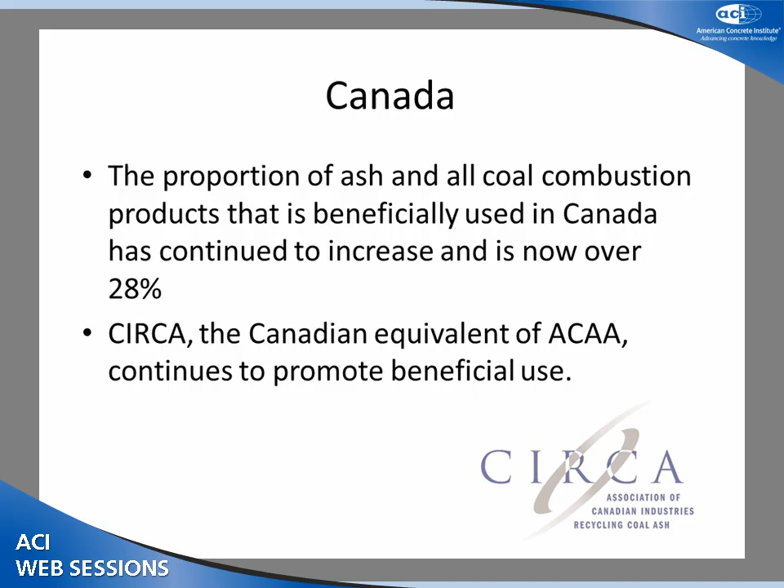We'll talk a bit about Canada, because being from Canada, I probably have more to say about Canadian ash use than other places. Tom, you indicated 43%, but Canada, at least with the latest data I have access to, is about 28% overall. In Canada, similar to the Ash Association, we have the Canadian Industries Recycling Coal Ash, CIRCA, and they are involved with promoting the beneficial use of ash as well. That's the latest government statistics in very fine print. That's what I can put together quickly.

And so on fly ash, it produced about 4.3 million tons, of which about 1.2 million tons has been utilized. This is from data averaged over 3 years, 2009 to 2011. So it's about 28% on the ash. The desulfurization gypsum, though, is 100% utilization. So that's one of the products that's been picked up quite readily by industry from the CCPs.

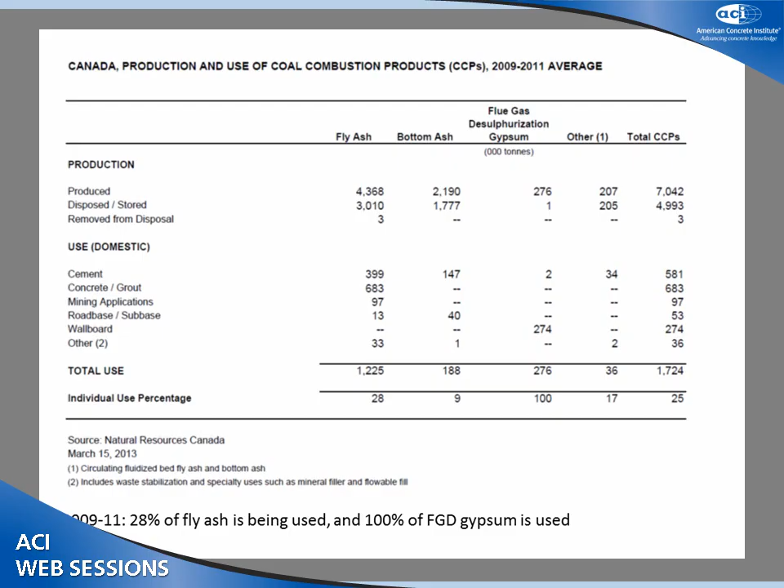And Environment Canada, which does the regulatory work similar to the EPA in the U.S., continues to maintain that coal-combustion products are non-hazardous. And we keep going back through CIRCA to ask them that question and they keep saying the same thing. There's no plans to move it. However, if EPA ever did declare it hazardous, you can see what's going to happen in a very short time.

We've already seen that on the east coast of Canada, where people in Newfoundland were getting fly ash from Nova Scotia from one of the power plants there to control alkali silica reaction, because Newfoundland is basically reactive aggregates, the whole province. They were using fly ash, and all of a sudden they couldn't get fly ash because the Nova Scotia Power Company said, we're worried about what the EPA is going to do, and that's going to open up our liability, even though it's in a different country. So they stopped supplying fly ash. So now the concrete company still makes concrete with reactive aggregate without fly ash, with slag.

And of course, there are challenges to these. Since 2012, they've required mercury reduction abatement. That's largely affected the big coal plants in Alberta and Saskatchewan. And they're using powder activated carbons to scrub the mercury. And this has impacted the ability to air-entrain concrete.

It's not so much, there is some LOI increase, but it's the activity of these carbons. They're very high activity carbons, so they adsorb some of these organic admixtures. I understand in Alberta they're experimenting with some new materials that will scrub the mercury with much less impact on that. But the initial materials had some impact on the ability to air-entrain concrete.

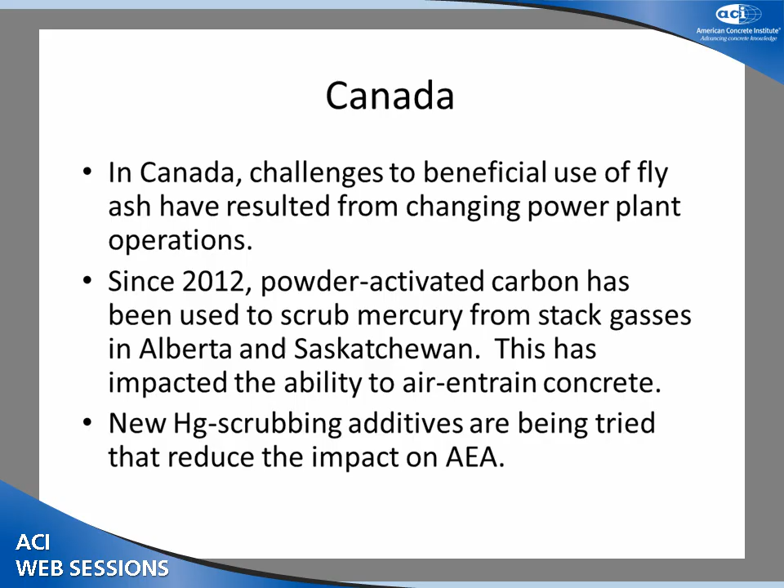I don't have any specifics on that because it's proprietary.

In terms of Canadian specifications for ash, they're different than the ASTM/AASHTO specs in that we classify the ashes based on the calcium content rather than the sum of the oxides, the sum of the silica, alumina, and iron approach. And I guess the sum of the oxides was meant to represent the glass phase of the fly ash.

Well, I'm not sure why iron was ever in that story, because most iron in fly ash is magnetite or ferrite individual particles, so it's not part of it. And even some of the silica and the alumina is there as mullite, inert ceramic material essentially. I've never quite understood why the sum of the oxides is a smart thing to do, except it was probably easier to measure the calcium at the time using chemical techniques.

And the other thing about the Canadian spec is that fly ash is part of the cementitious system. At ASTM, the fly ash spec C618 is in the C09 book, the concrete spec. It's not under the cementitious materials part. Ours used to be like that, but about 15 years ago we picked up all the materials, fly ash, slag, silica fume, natural pozzolans, and put them under one big standard for cementitious materials, because it's part of the cementitious matrix in concrete.

Then we actually fit everything into one standard. We have Portland cements, blended cements, and all the supplementary cementing materials in one standard, A3001. And it makes it a lot easier to deal with the cementitious system, having that sort of logic to it. And of course, the reason it's still in C09 at ASTM is history.

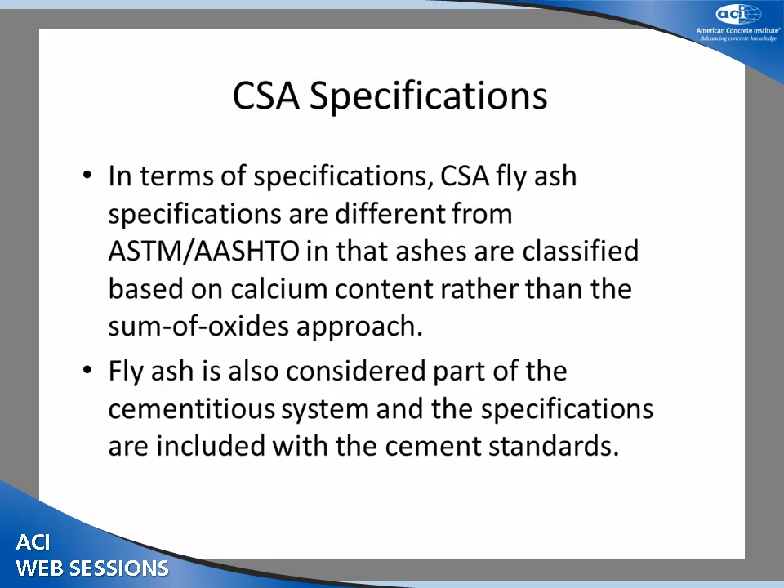When the fly ash people came to ASTM way back in the 50s, the cement people didn't want anything to do with them. So they went over to concrete because they gave them a home. And that history goes back a long way. And it was the same in Canada. We had to fight to move those things into the cement standard because of that history. People have long memories. But it makes a lot of sense that it was part of the cementitious matrix. So we have these classifications which we've shifted a bit.

The Class F ashes, instead of being 70% or more sum of the oxides, it's up to 15% calcium oxide. So it basically accommodates the Class F ashes that you would see here as well. And then we have two types of C ashes, 15 to 20% calcium and above 20%. The really high calcium ashes are ones that have some severe challenges in terms of durability concerns, like sulfate attack or alkali silica reaction mitigation.

And the ones in between, the CI ashes, can often perform very well. Not always, so they need to be tested. So we require testing of the CI ashes. Well, we require testing of all ashes, but the CIs can be either really good or sometimes they behave more like a CH. But once they get above 20% calcium, then we have concerns about the durability issues. They're often good technical ashes, good early setting times, good strength development, but they often are associated with some durability issues.

We also sort, in terms of ASR, on the equivalent alkali content. We consider anything up to 3% alkali as being low in terms of the ash. And then we have a second category, if you're up to 4.5%, you need more mitigation of the ASR potential. And if it's above 4.5, you have to use testing rather than an expert system to prove it.

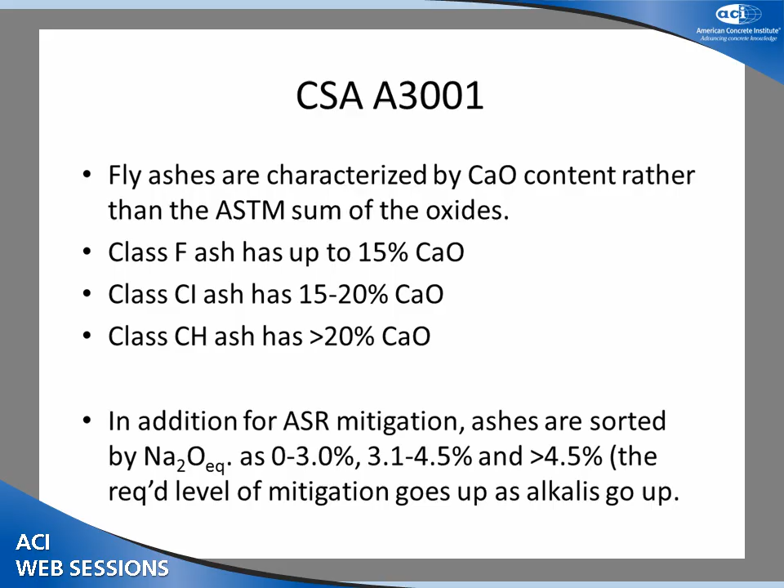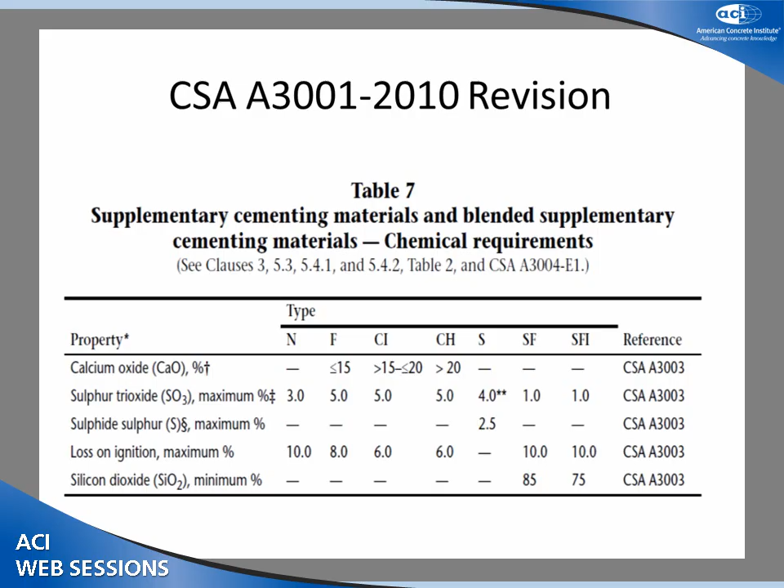Okay, so A3001, what was I going to show you here? Oh yeah, there's the calcium. The top line there, the F ash, CI, and CH, it's all regulated based on the calcium content of the ash. And then we combine some natural pozzolans, just like the US, F, CI, CH, and we've got slag, silica fume, and we've got a lower SiO2 silica fume as well. They're all in one table in the standard. And so the only thing that applies to ash, really, other than sulfur trioxide and loss on ignition, is calcium.

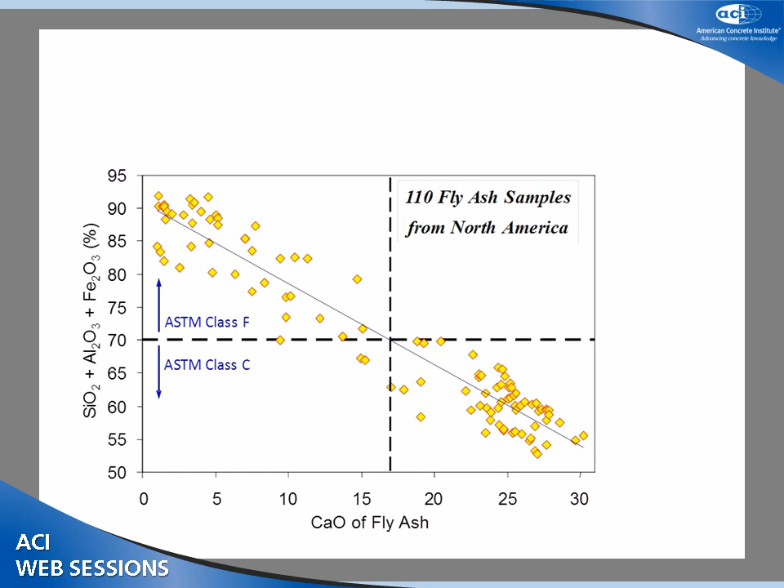Okay. So in terms of how that relates, as I said before, this is some of Mike Thomas's data that he's pulled together, comparing how you would classify things in ASTM on sum of the oxides versus calcium oxide. And the 70% sum of the oxides is around, if you draw through the median, the best fit line, 17%. But when you get down to the noise in the data, it's about 15%. So in terms of performance, I'm pretty comfortable with the 15% being similar. So an F ash on one side of the border is pretty much an F ash on the other side of the border.

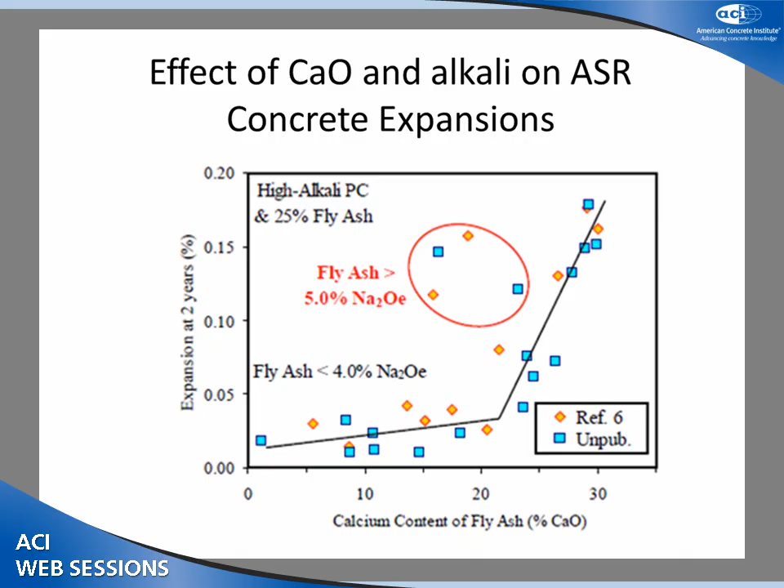To mitigate ASR, you've got to reduce the pore solution concentration of hydroxyl ions down to a level that they won't attack the siliceous aggregates. And so if you have high calcium fly ashes, you're adding phases into the system that can keep that hydroxyl ion concentration up, unless you put in a lot of fly ash. But at 25%, it's insufficient when you get to these high calcium ashes. So it's not that you can't use them, you'd have to use a lot more fly ash in that case to control it.

Okay, now for sulfate resistance there's a similar graph. This is with some ashes where we blended different F's and C's, or this is Mike Thomas's data again, because I was scrambling to get some data together here. Again, related to calcium content. Typically we want 0.1% expansion or less in C1012 at a year. And so when we get down below 20% calcium content in the fly ash at a 25% replacement level, we're below that expansion limit.

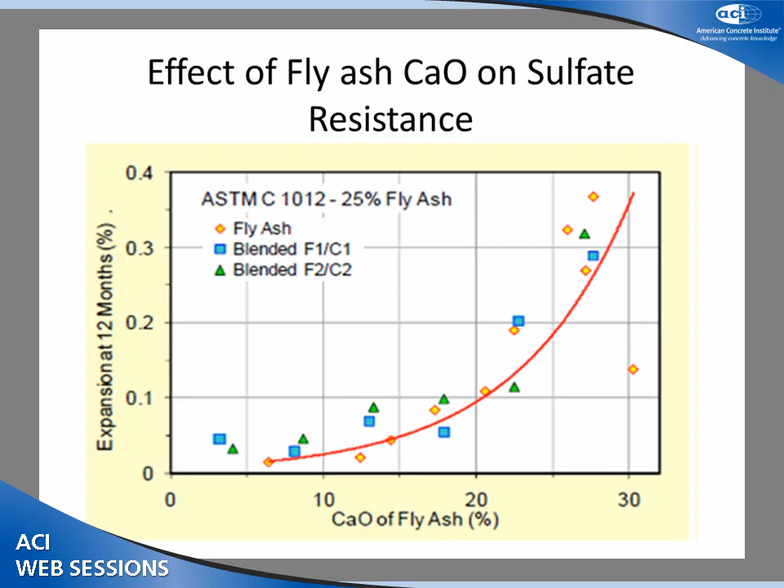And if you want to be sure, to get a little more safety factor, 15 is what we pick. So we're saying 15 to 20 may work, but you need to be more careful in the testing, and below 15, at a reasonable level, you get good sulfate resistance. But you start to see the sulfate resistance deteriorate at a given amount of ash, because you've got things like tricalcium aluminate in some of these high calcium ashes. You've got other phases in there that may contribute to the sulfate reaction. It may actually be detrimental at a given level of ash replacement. So the calcium content is where we are in the Canadian standard with respect to those two durability issues. And that's why we picked calcium as the indicator.

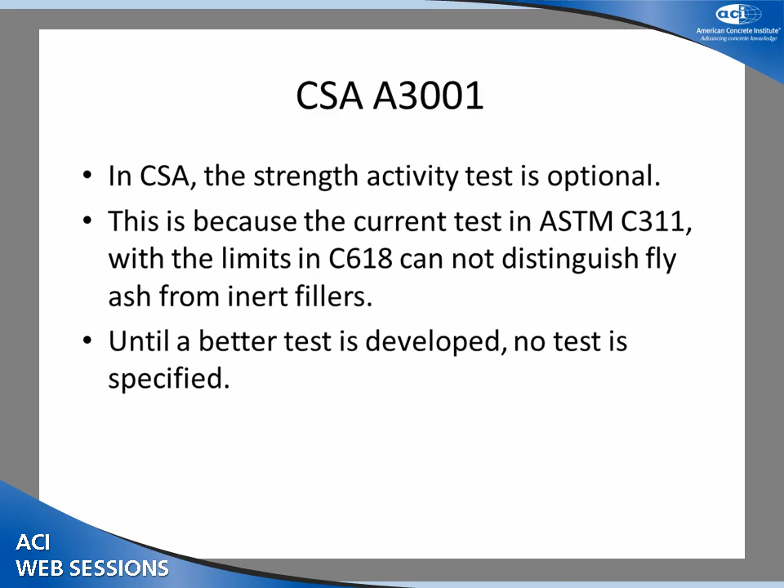The other thing, since I'm talking about random elements related to fly ash, we use the same strength activity test in the CSA as the ASTM C311 test, and we had the same test limits as in C618. But then we made them optional because the current test method in C311 and the current limit in C618 means you can take inert fillers and pass the test. So why bother doing the test? And so we just said, look, it's optional. We're not going to mandate anybody doing that test because it doesn't tell us anything, until somebody comes up with a better pozzolanic test or a better test limit to evaluate it in comparison to.

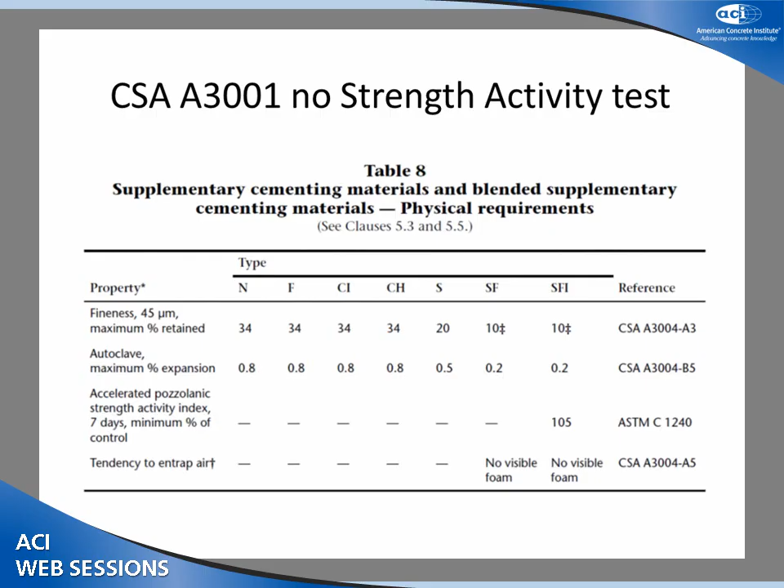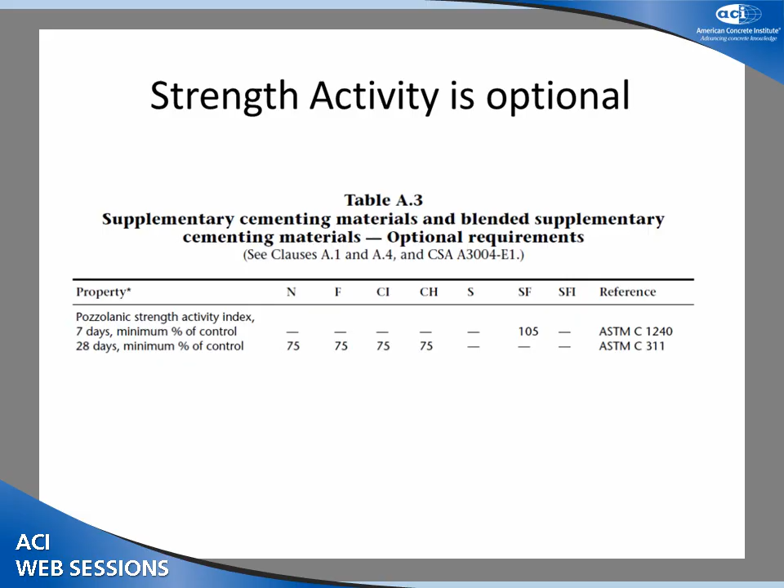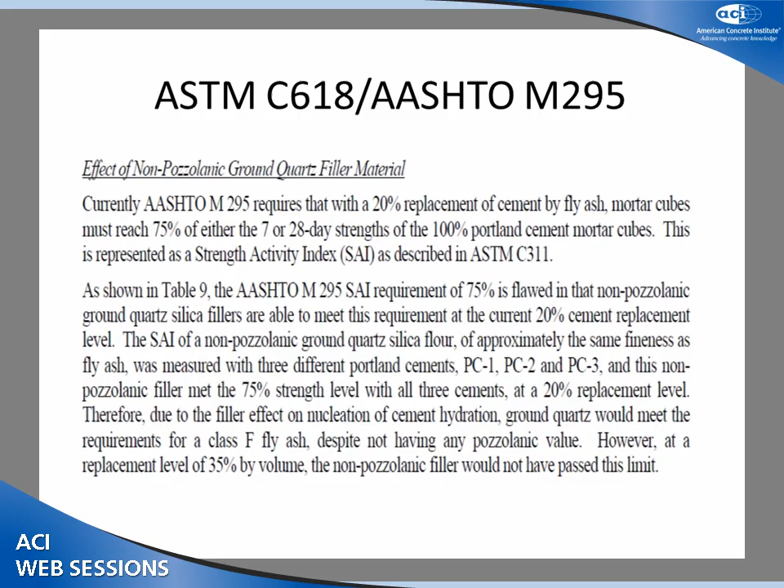And so when you look at the table for supplementary materials, the only test it requires is for silica fume; the rest of it's non-mandatory in any of the fly ash categories. And there's the optional test, and again, it's the same thing. It was the 28-day test, just like in C311, with the 75% requirement, when you take 20% of the cement out, and so essentially you get 75% of the strength after 28 days. That's great. So you can take a ground quartz filler and pass that test. The limits are in C618. You can take a ground limestone filler and pass that test. So to me, the standards committee at ASTM needs to think about that in terms of modifying the test.

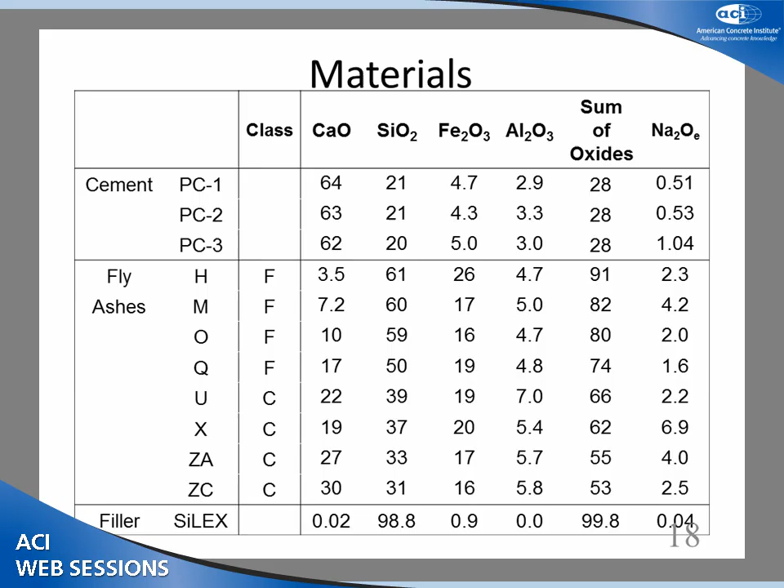We did some testing. I did some testing together with Larry Sutter a few years ago on a pooled fund study, and here we used a quartz filler in this case. We used it with 3 different Portland cements, and we tested it relative to 8 different fly ashes, C's and F's, and we looked at the strength activity index, and this is just with the quartz filler.

giving us anything. Now, if you went to 35% replacement, which is the old activity index test, then those fillers wouldn't pass, because 20% is about optimum for a lot of different fillers. But when you get up to higher replacement levels, when there's nothing going on there, then you start to distinguish the non-reactive materials from reactive materials. So one of the big problems was that switch from 35% to 20%, which was about 15 years ago or more. And so they wouldn't have passed the old strength activity index under the old system.

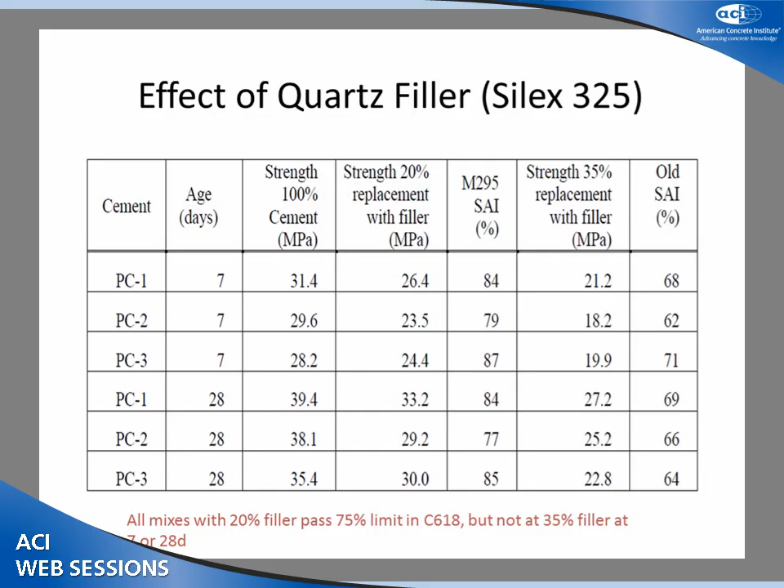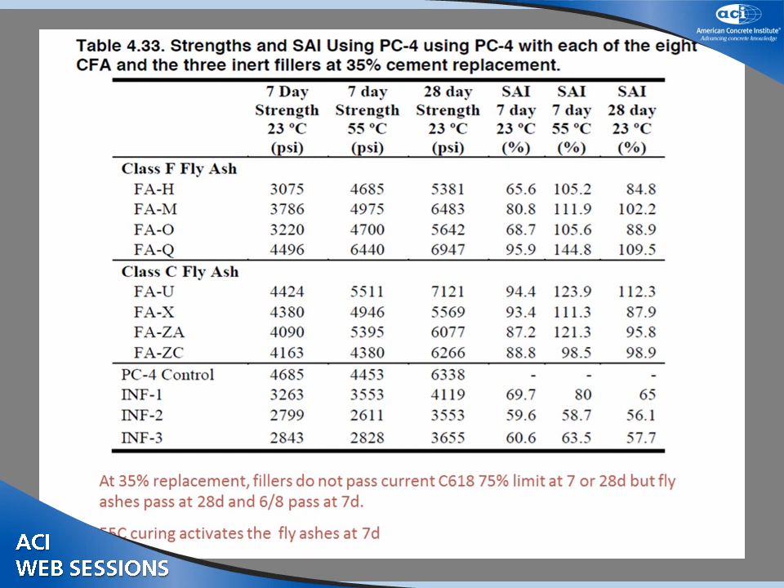Okay. We tried just for fun. We did it with three different fillers, and we got different results. Some fillers work better than others, but you couldn't distinguish the fillers from some of the fly ashes in that case, especially the 7-day test.

Okay. Now, closer to home in Ontario, and Tom mentioned that Ontario is getting out of the coal power production business. By 2014, all the coal plants would be closed in Ontario. They were shutting them down over the last 7 or 8 years, several units at a time. And it used to be that coal power was our largest generation in Ontario back when I was with the power company. But for the last 25 years, the ash that has been produced, because it was used for peak power production, tends to have variable and high loss on ignition values. We often see loss on ignition of 12, 15%.

So that didn't make it very useful for concrete, but it has been used very successfully, almost 100% of the Ontario ash, as cement kiln feed by the cement industry. If you take a material that's got 12, 15% fuel in it, they're getting free fuel with the raw material. They get their iron, their silica, and their alumina from that material, and the silica is already fused into a glass, which makes it easier to combine in a cement kiln.

They actually saved about 15% of their energy by using fly ash as a raw material in the cement kiln. So they've had unit trains running into Michigan. Alpena, Michigan has been using Ontario fly ash as part of their raw mix for the last 20 years or so, amongst other companies. And it's the cement companies that are largely using the FGD sludges as well as gypsum replacements.

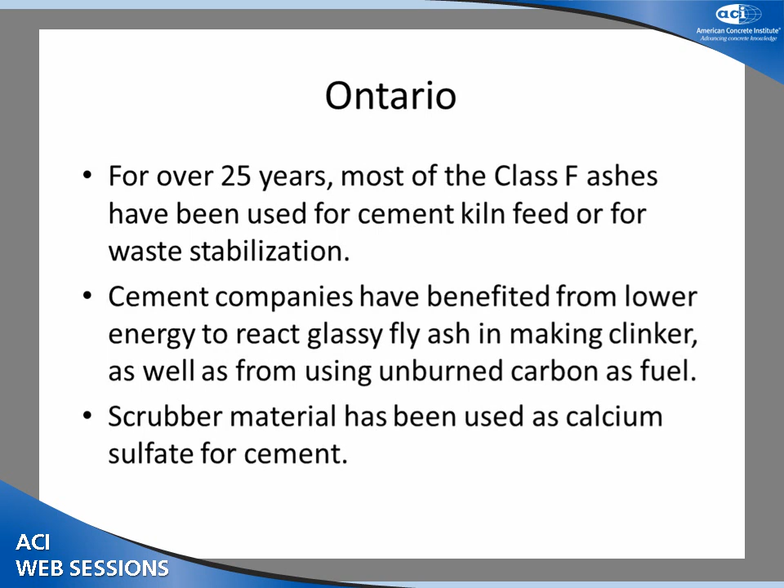Okay. So I mentioned this, they're shutting down, the last units will close down in 2014, except they're going to convert one or two up in northwestern Ontario to biofuels because of local employment issues. So there's politics involved with all this as well. Now the tobacco farmers in southwestern Ontario are wondering why they can't burn tobacco instead of coal in cement kilns.

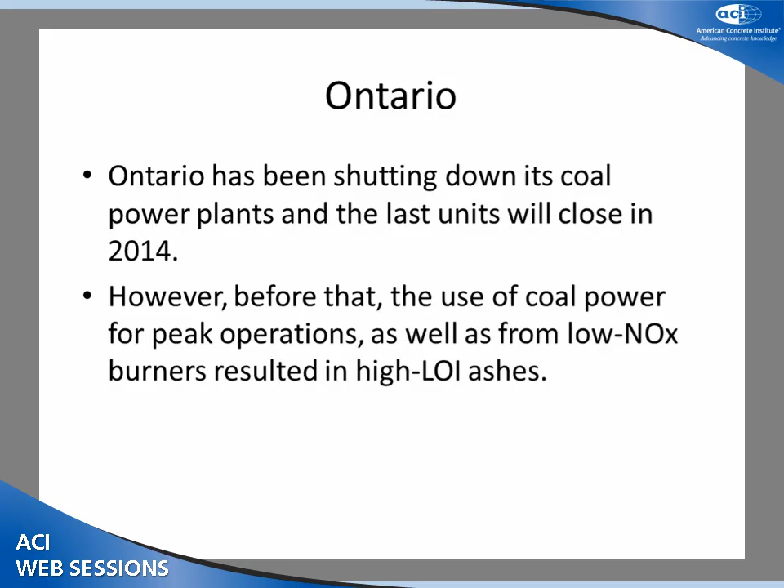Okay. So I thought I'd talk about a couple of examples. How am I on my time?

Yep. I'm good? Okay. On the beneficial side, I'll just talk about a couple of things, since I'm in Ontario, about where ash has been used positively. This is a dam that was built in 1970 up in northern Ontario. There's a spillway on the left and the penstocks coming down, and the main front of the dam is concrete, the rest is rock fill. But it was built with reactive aggregate.

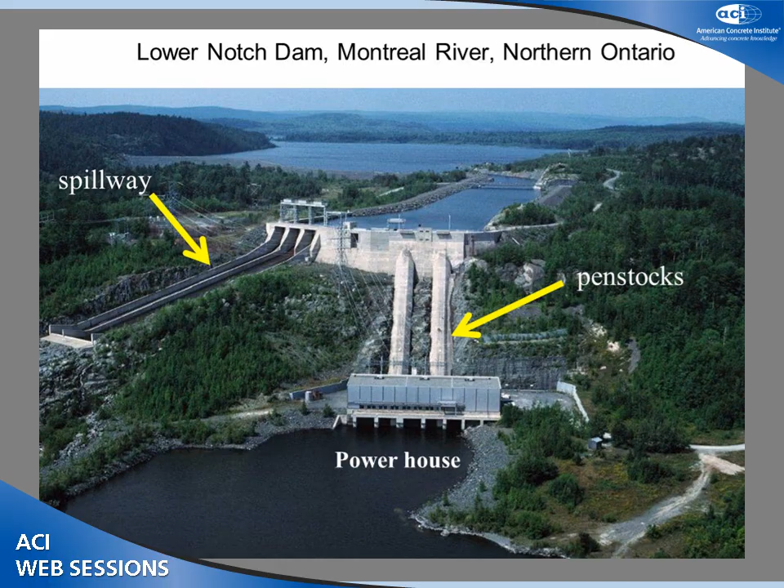Because the forebay above the dam had to be excavated, and it's all reactive rock. And of course, it's way out there, about 6 hours north of Toronto, and they had to use it. At the time, there weren't a lot of options. So it was built with this reactive greywacke argillite aggregate. They only had the C227 and prism test then, and they found with that C227 testing that you could control this with low alkali cement, or you could control it with 20 or 30% Class F ash.

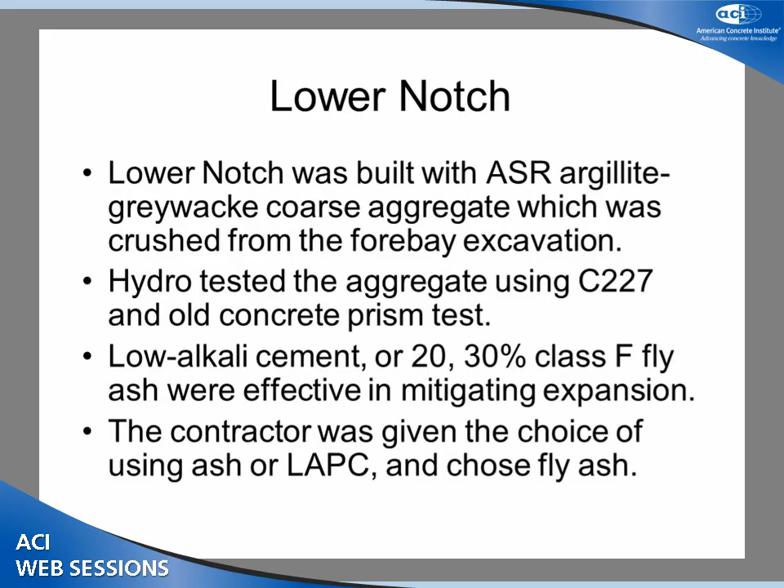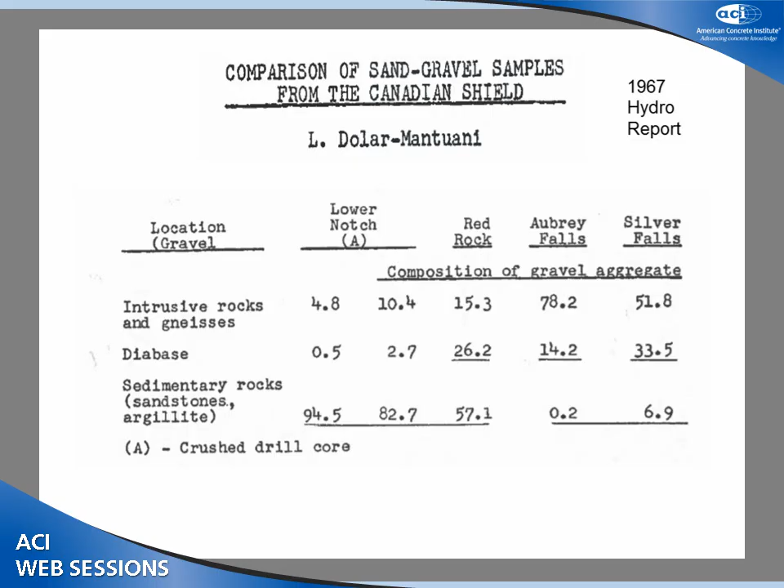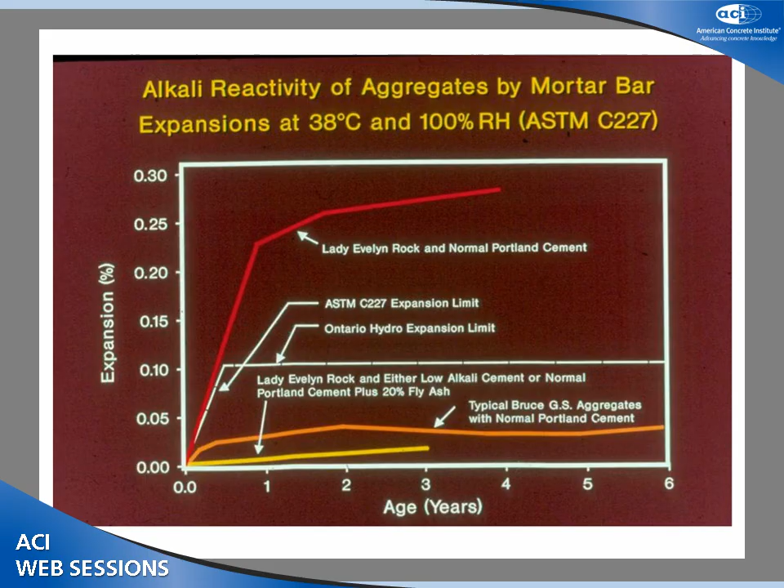This is just some information on the rock types, not really important. But they identified these reactive phases in the rock types that were used. And that's the original 227 data, showing that if you made it with high alkali or normal Portland cement and this rock material, with a dam nearby that was built at a similar time, then they would get deleterious expansions; if they could either use fly ash or low alkali cement, they could control that.

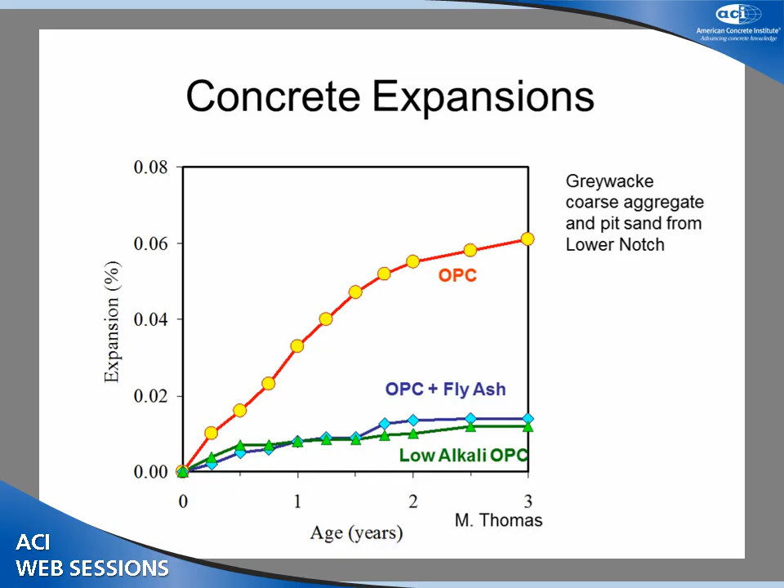And then later on we were able to get some aggregates because they were crushing the rock. There's still aggregate stockpiles of all the different sizes up there. And Mike Thomas remade some concrete prisms, and it shows that with the normal high alkali Portland cements, you would get deleterious expansion. You'd exceed 0.04 a year. And with the same cement and the 25% fly ash or the low alkali cement, you can control that aggregate.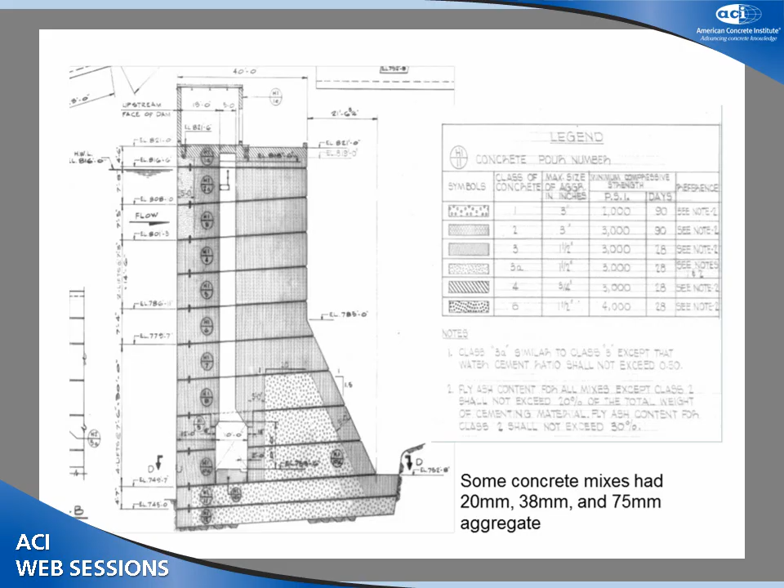And I know it's a difficult slide to see, but there's core concrete with up to 3-inch aggregate in it. There's other concrete with 1.5 inch aggregate. They got face concrete on the decks where we're exposed to frost with 3/4 inch aggregate. And the highest strength there is 4,000 psi at 28 days, but most of it's like 1,000 to 3,000 psi at 28 days or 90 days even. So the core concrete, because they're looking at mass concrete and heat of hydration, they don't want to have thermal cracking. So they're relatively low cement contents, low strength.

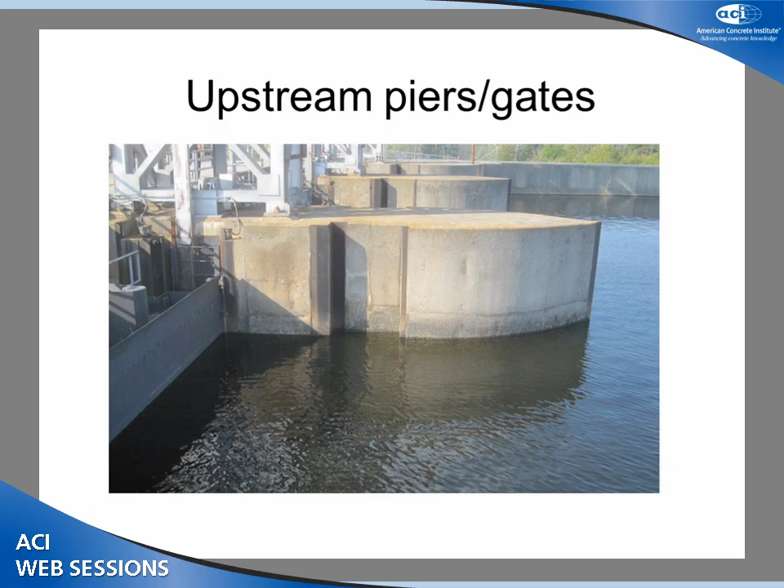But this thing is now 40 years old. We were up there in 2010 when it was 40 years old, so now 43, I guess. And there's no evidence of ASR damage in the structure, made with a 1.1% alkali cement, but 20% F ash, and this reactive rock. So here's just on the upstream on some of the intake structures, and there's no damage. This is on one of the wing wall sections. Again, there's no ASR damage. There's a bit of frost damage in a couple of places, but no evidence of ASR.

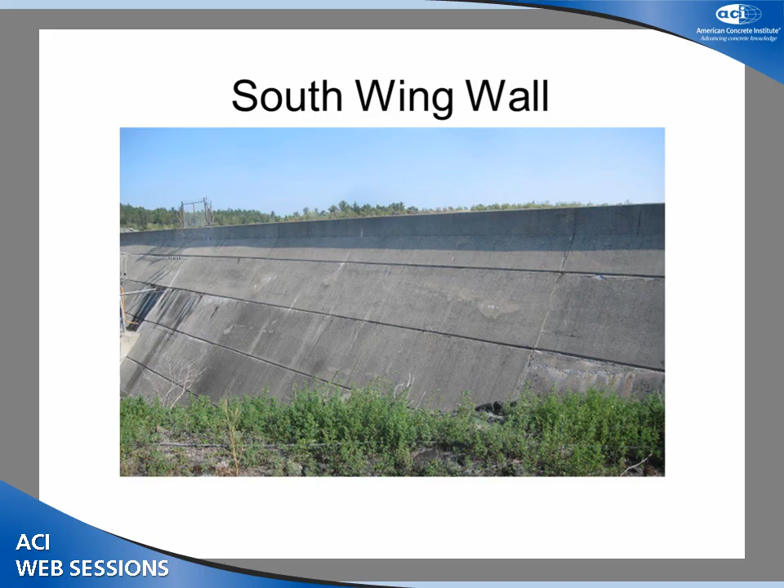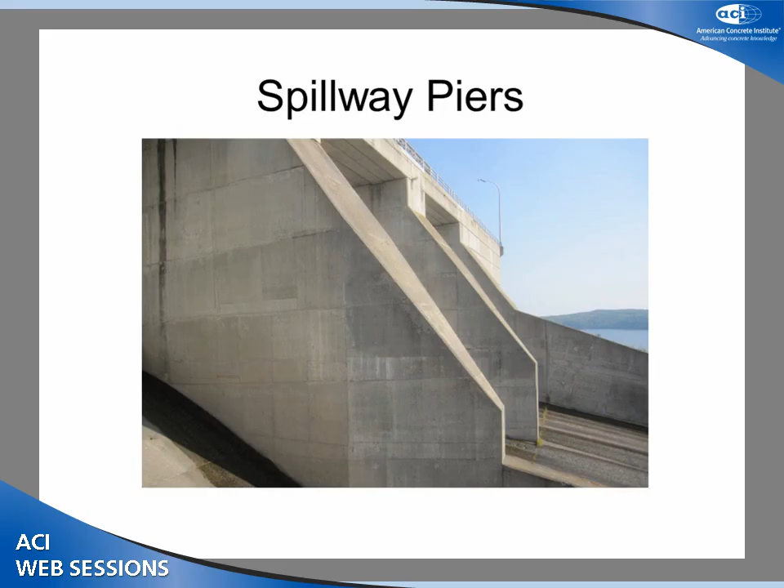We were down in the tunnels. We've taken cores. We've done damage rating indices. We're not seeing any evidence of damage with that structure. Yet there are structures built with similar aggregates in the neighborhood with Portland cement that have all cracked up. So we've got a good basis for that. So some of the cores we use for the damage rating index testing, we've got cores in 6 feet into the structure to evaluate the performance.

Now, related to this, Mike Thomas has been looking at a structure out in New Brunswick where they've got a dam there that needs to be replaced because of alkali silica reaction. They're planning to do it about 15 years from now. But one of the interesting things there, which relates to what Tom said, is that the power plants that are producing coal ash there now may not be in operation in 15 years. So they've got landfill deposits, and they've actually excavated some of the landfill ash and used it to evaluate its performance to control ASR, if they need to rebuild this dam, because they're likely going to have to use the same reactive aggregate because of the volumes and the locality.

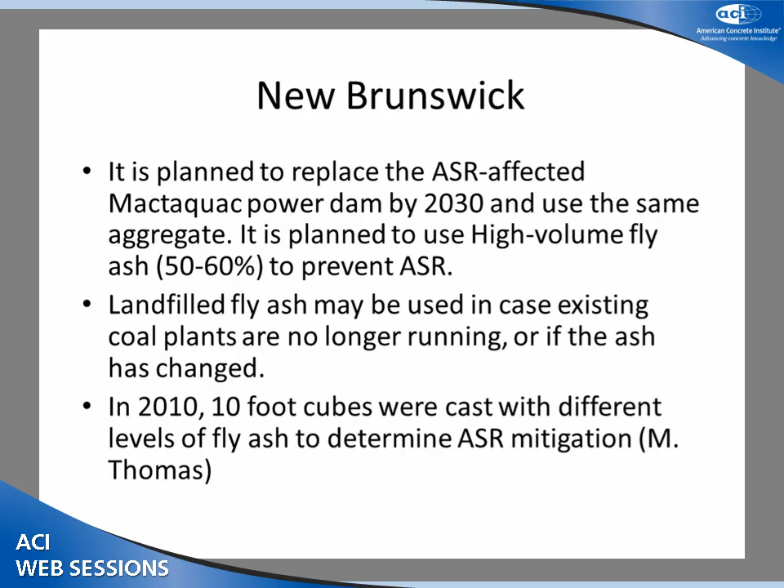So in 2010, they cast 10-foot cubes with this material. In addition to the normal lab testing in small cubes, they cast 10-foot cubes with both reclaimed and new ash. That just shows the dam there. It was built in the mid-60s. It started to show damage about 10 years later. I was out there around 1982, I remember, and they were having to post-tension it so the dam didn't break in two.

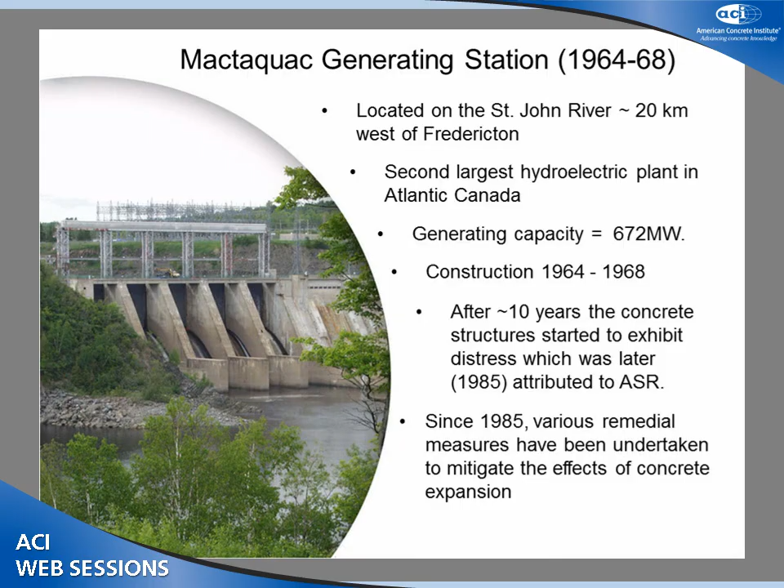And the turbines stopped working for a while, and they put 7 diamond wire saw cuts through it. They're 15 millimeter saw cuts, and within 24 hours they're closed. That's how quickly the stress relief occurs. And they've been spending a lot of money on that, using a high alkali cement in the 60s. They ignored the advice of the petrographer that maybe they should look for low alkali cement.

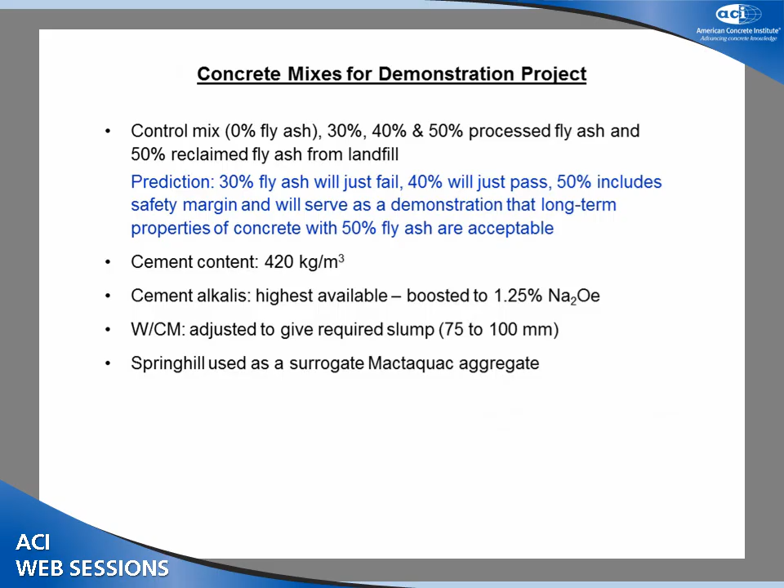And they paid for that. So anyway, they did some mixes for the demo. They did high cement content, boosted the alkalis, but looked at ash 30, 40, and 50% to see if they're going to build this new replacement dam, whether it'll work or not.

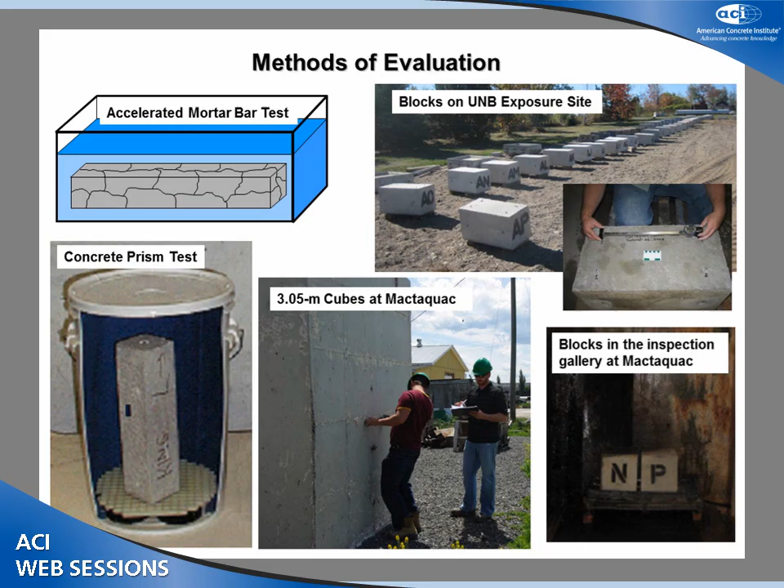And Mike did work on the mortar bar test, the concrete prism testing. Got smaller exposure blocks outside, and they got these big 10-foot blocks out there, which were cast. So they'll almost have 20 years on the blocks by the time they need to pick the aggregate. That shows the blocks outside. And it shows the expansion after 3 years.

It shows that they've already reached failure expansions on the control blocks without fly ash after 3 years in the field. But with the processed or the reclaimed ash, they're not getting expansions. So they're looking at potentially using the reclaimed ash in those big blocks to rebuild the dam. Okay.

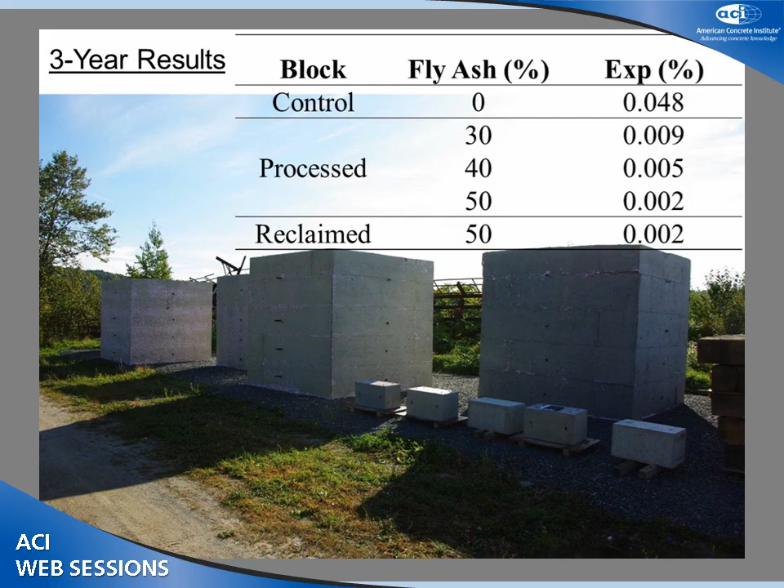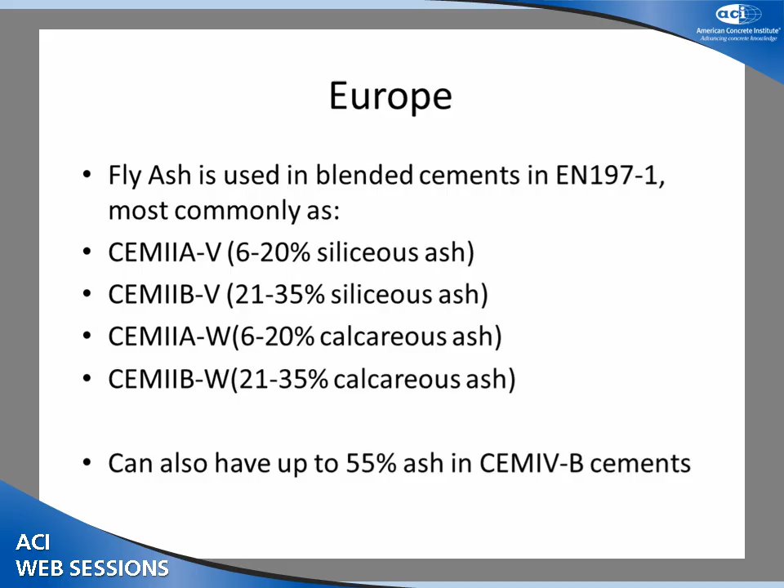2 minutes? Okay, I'll just mention Europe briefly. A couple of things. In Europe, fly ash largely is covered under the blended cement specs. There is some ash available that's added to concrete, but a lot of it's used under these cement specs, typically the CEM II/A, and V stands for the siliceous class F ashes, and W stands for the calcareous or high-lime fly ashes. There are some other categories where they use fly ash, but EN 197-1 has these different levels of ash, used up to 20% or up to 35%, and differentiated on the type of ash.

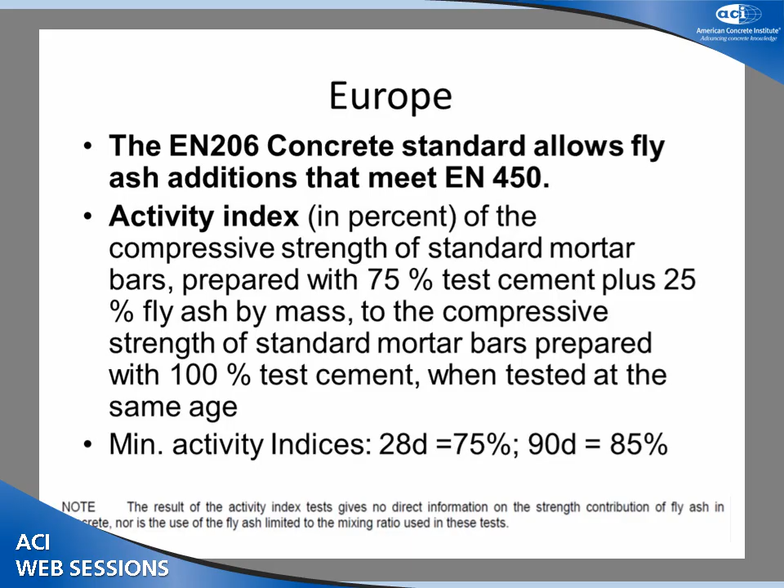It's interesting, the strength activity: EN 206 is their concrete spec, there's also a standard EN 450 for fly ash. Their strength activity test is pretty similar to the ASTM test. They take out 25% of the cement, put in 25% ash, and in 28 days, you've got to have 75% of your strength. So, in other words, you can do nothing and still pass.

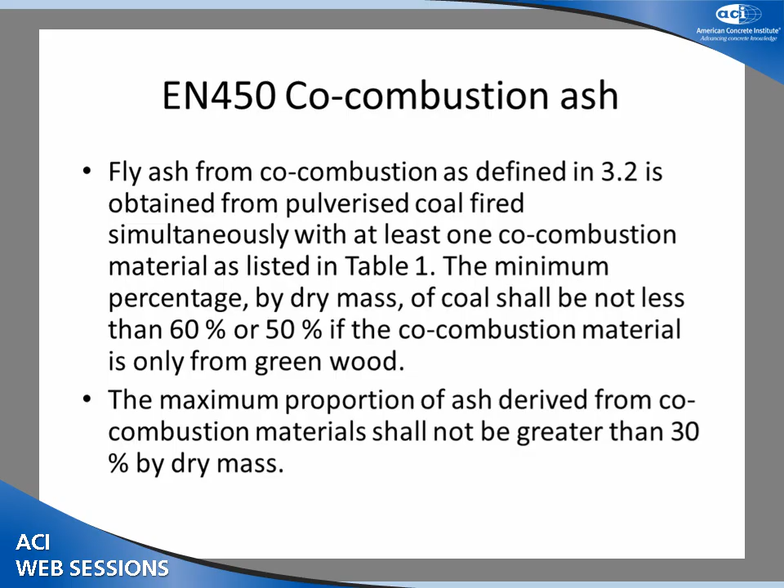But the other interesting thing, and I didn't mention this earlier, the CSA standard allows co-combustion of up to 25% pet coke with the coal, because a lot of plants are burning pet coke in combination with coal, so we actually allow it in the spec. I think ASTM C618 is a little quiet on the situation. But EN 450 allows co-combustion as well in their standard, at least the latest version. They limit the amount of co-combustion material to about 30% of the ash composition.

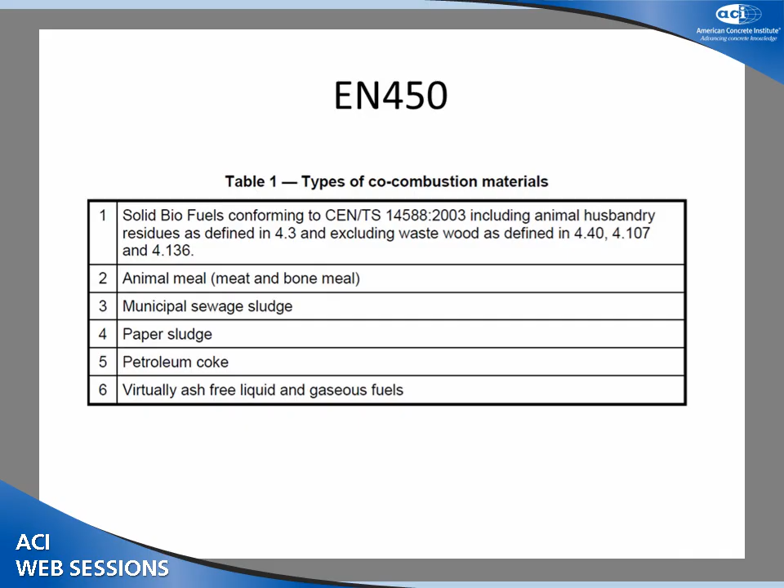But this just shows what they mean by co-combustion. Solid biofuels, which could be wood residues, could be animal meal, could be municipal sewage sludge, could be paper sludge, could be pet coke, or it could be some solvents. So when they say co-combustion, it can be a whole host of things that are allowed under the ash spec in Europe. So that was just a bit different.

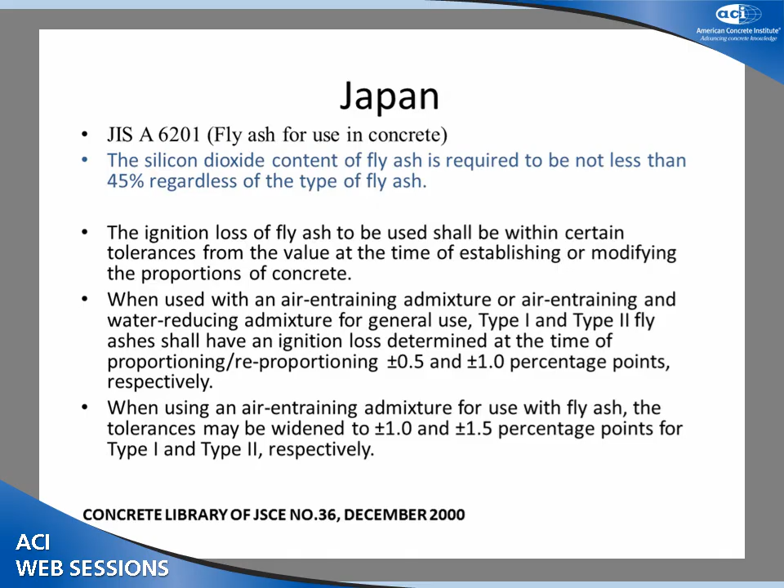One of the things I got out of the Japanese standard, actually a report that Professor Nagataki wrote some 10, 12 years ago. They have a requirement that the SiO2 content of the ash, regardless of the type of ash, has to be at least 45%, which I thought was interesting. And then when you use it in concrete, you take the LOI of the fly ash you use to establish your mix designs, and it's not allowed to vary by more than about 1% either way, or you're doing reproportioning during a job. And that's why they control the LOI of the ash. You establish a base LOI, and then you have to stay within the limits of that. So I thought it was an interesting way they approached that problem.

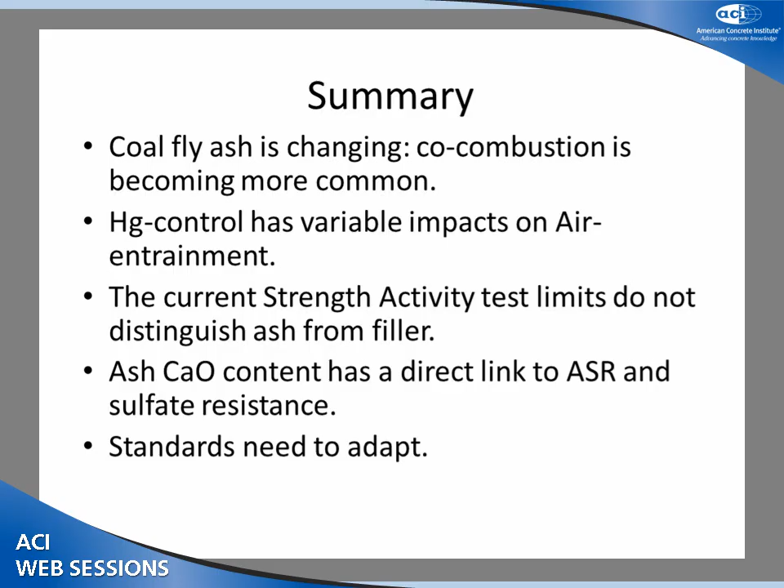Okay, so in summary, coal fly ash is changing because of the environmental regulations. Co-combustion is becoming more common. The powder activated carbon issue for mercury control is becoming a bigger issue. The current standards, at least here and in Canada, don't distinguish ash from fillers, and that's an issue. And the calcium oxide content, I think, has a more direct link to some of the durability issues that we're concerned with in the use of ash in concrete. And I think the standards need to adapt to those changes if they want to remain relevant in the marketplace. So I'll leave it with that. Thank you.

Any questions for Doug? When it comes to mitigation of ASR, it looks like the F ash is the ash of choice. Do you guys ever use Class C ash from Canada for mitigating ASR? And why is it that you really have to boost the addition so much?

Well, again, with ASR, you're trying to reduce the hydroxyl concentration in the pore solution. And ash does that by reacting with some of the alkali and the calcium to reduce that hydroxyl. And you're not reducing it really low. You're bringing it down to about, if you get your pH down around 13.2, still alkaline enough to prevent corrosion, but it basically makes the concentration of alkalis in solution below the value that will cause attack of the aggregates.

And so with the Class C ash that has calcium in it, you're not going to have that same reduction of alkalinity in the pore solution at a given amount of ash. So instead of using 25%, you might have to use 40%, because more of it will react, and eventually you'll get reduction in the alkalinity of the pore solution. Okay, thanks.